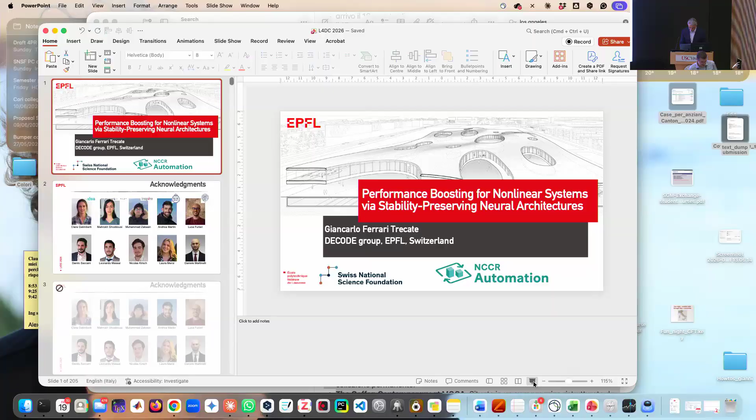Professor Ferrari Trecate is also the founder and chair of the IEEE CSS Society Swiss chapter, and a senior editor of the IEEE Transactions on Control Systems and Technology. Today he's going to talk about performance boosting for nonlinear systems via stability-preserving neural architectures. We're looking forward to the talk.

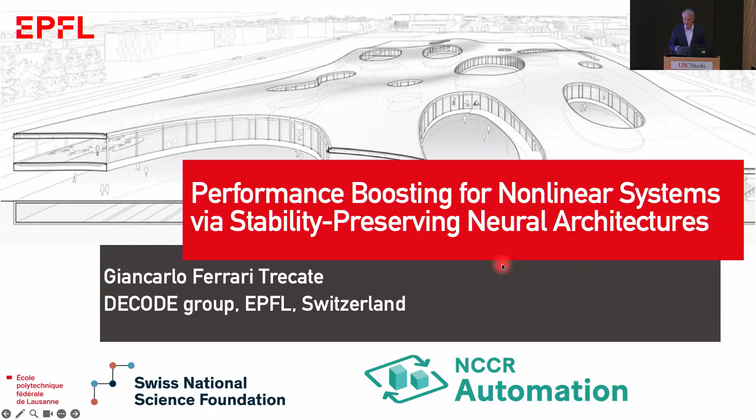First, I would like to acknowledge the key contribution of my students. In the top row, you see former lab members who moved to their next job in academia and industry. In the bottom row, current lab members who are very actively doing research on the topics that I will present today.

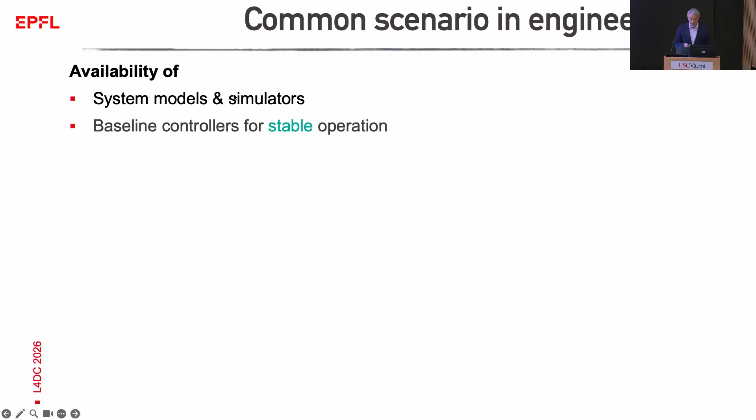The research has been motivated by a common scenario in engineering. Often we have system models and simulators of the system we want to control, but also baseline controllers guaranteeing some form of stable operation. And the problem often, rather than stability, is really performance.

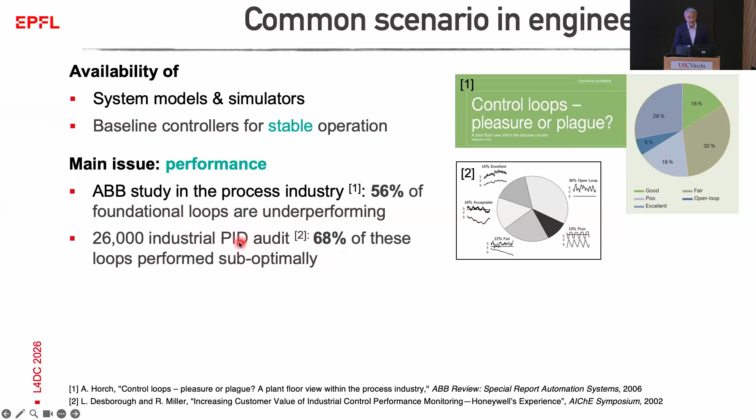To support this claim, let me mention an ABB study in the process industry showing that 56% of foundational loops in the process industry are underperforming, and a considerable percentage of these loops are not really closed loop, but open loop control. There is another study conducted a couple of years earlier by Honeywell, where 26,000 industrial PID controllers were audited, showing that 68% of these loops performed in a suboptimal way.

Performance is not affecting just industrial plants, but also systems we have in our labs. Here you see a beautiful robot built in the lab of Jamie Paik at EPFL. It's made of triangular elements with onboard sensing and actuation capabilities that you can compose like Lego bricks in order to obtain robots with different functionalities.

Here you see a walker, but how is the walking orchestrated? Well, thanks to a very smart distributed PID controller. But there is a price you have to pay for using basic controllers, which is the following: the robot is slow. So this leaves considerable room for improving the performance of the robot.

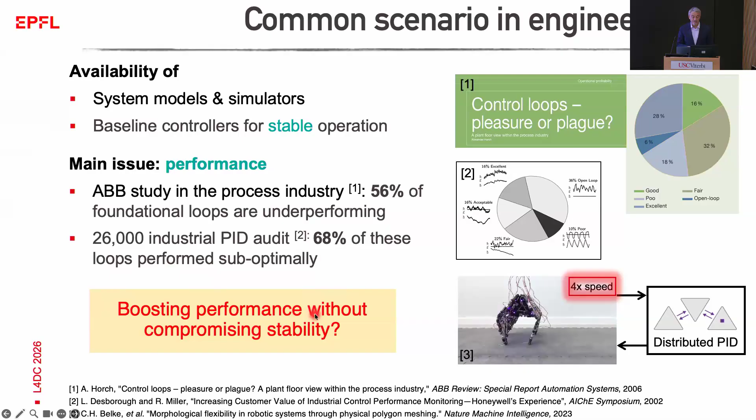And that's exactly, again, the topic of today's talk. I will talk about boosting the performance of a system without compromising stability.

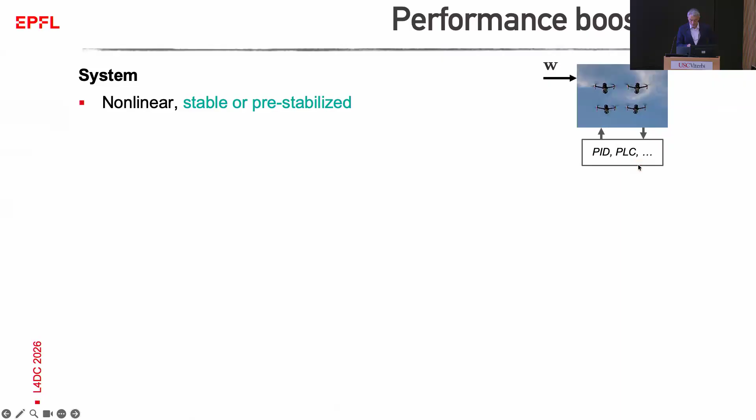Let me be a bit more formal about the problem that I call performance boosting. I want to consider a system which is nonlinear and stable or pre-stabilized. The example is here in the cartoon where you see four drones which are hovering about target points, irrespective of the wind, thanks to the internal action of controllers. What they want to do is close an outer loop in order to improve the performance of the system, represented here in the cartoon with the four drones doing a backflip maneuver.

More concretely, what we want to do is minimize a cost function, L, defined over a finite horizon, and L is an arbitrary cost, so not convex, not quadratic. Why this? Because I would like to include in L performance measures of interest for companies. For instance, in industry, you are interested in optimizing economic factors, minimizing energy consumption, or promoting safety. And since I want to optimize a possibly highly nonlinear cost function, I also want to use a very flexible family of controllers, and to this purpose, I will include neural networks in the controller.

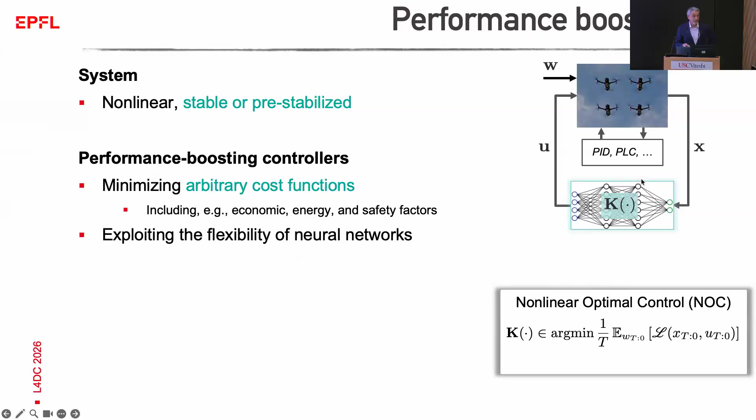What's the key challenge? How to guarantee closed-loop stability. We know, even in the linear case, that even if the plant under control is stable, you cannot plug in whatever controller and hope to have closed-loop stability, right? Here I want to study the same problem, but in the full nonlinear setting.

So, if I have to summarize in one sentence what you will see in this talk, I will show basically how to optimize over sets of neural policies which are stability preserving by design.

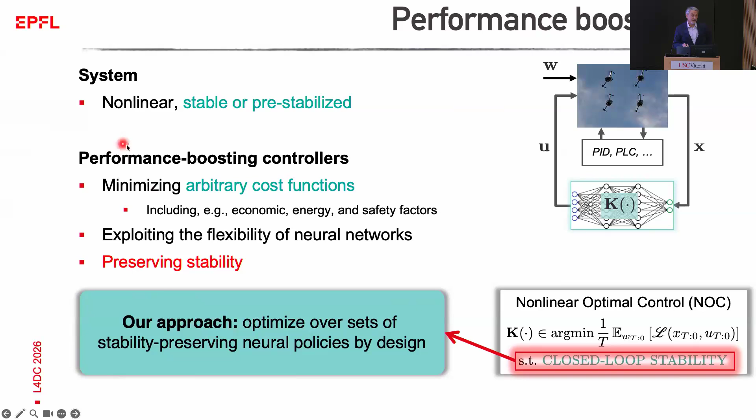Okay, so this brings me to the outline of my talk. First, I'll describe in more detail performance boosting controllers, starting with a theoretical result showing how to represent all stability preserving policies using a nonlinear operator. Then I show how to solve the nonlinear optimal control problem using neural policies to model these operators. The second part discusses the flexibility of the PB framework, showing that by shaping the cost and the operator suitably, you can fulfill several control objectives and cope with a variety of architectural constraints. Then I'll wrap up with conclusions.

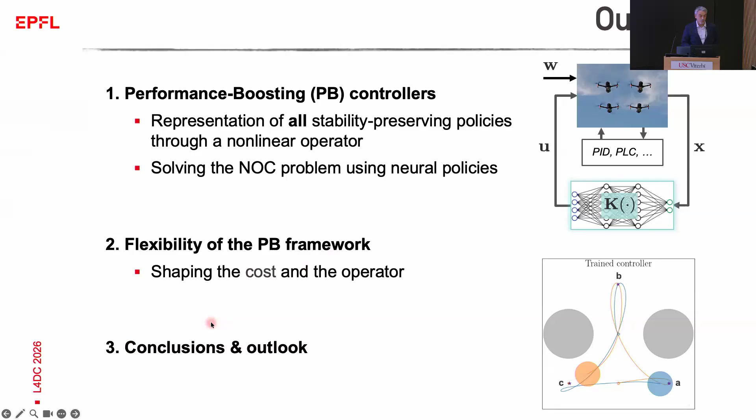So let me move to the first point. First, I need some notation. In this presentation, I will consider nonlinear time-varying discrete time systems in the state space, as you see here, affected by process noise. The only non-standard point is that I'm using the index T for F and W instead of T minus 1, just for notational convenience. Any standard nonlinear system can be written in this form.

Here I'm using also controllers which are time-varying and dynamical, and the dynamics is captured by the fact that the variable u at time t depends on the whole past history of the state.

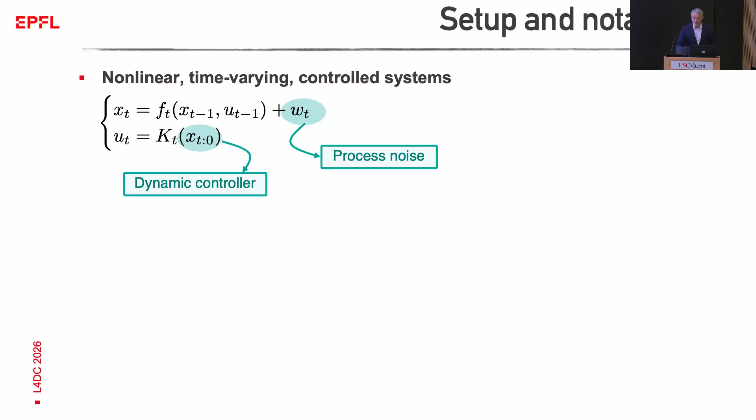Often I will abstract away from time by using lowercase bold letters for representing sequences and uppercase bold letters for representing operators, mapping sequences into sequences. This allows me to write this model in the signal space through algebraic equations that capture the closed-loop, infinite horizon evolution of the system.

To be more precise, and to show how to build the operator F, assume for the moment that the system under control is linear, so F is defined by the two infinite matrices you see here, with copies of A and B in the lower diagonal. What I've done is simply copy and paste this equation at each time instant to obtain this representation. One last point: I'm also embedding the initial condition of the system as the first element of the vector W, so I can assign this as an exogenous signal.

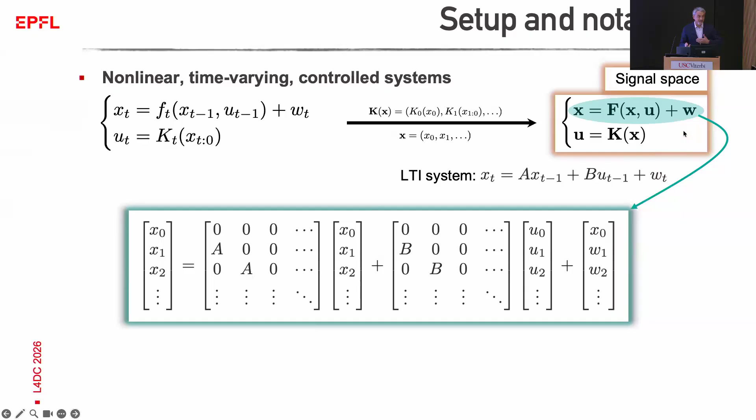Second point: stability. I'll focus on LP stability. An operator is LP stable if it has two properties. First, it's causal - I assume causality by default. Second, it maps LP sequences into LP sequences. A sequence is in LP if it goes to 0 fast enough for this sum to be convergent. When p equals 2, I'm just measuring the energy of the signal. For short, I'll use a calligraphic LP to denote the class of LP-stable operators.

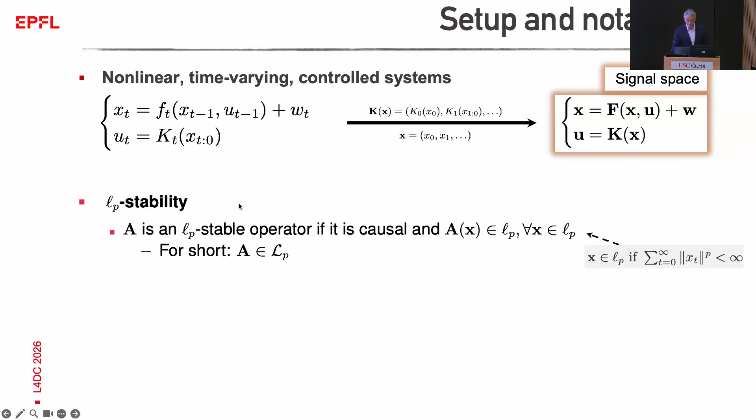I want to discuss stability in closed loop. What does it mean that the closed loop is stable? If you close the loop, the only exogenous signal is W. So here I want the operators, or the closed loop maps, from W to X and from W to U, to both be LP stable. That's the definition of closed loop stability, consistent with the definition of internal stability for linear systems.

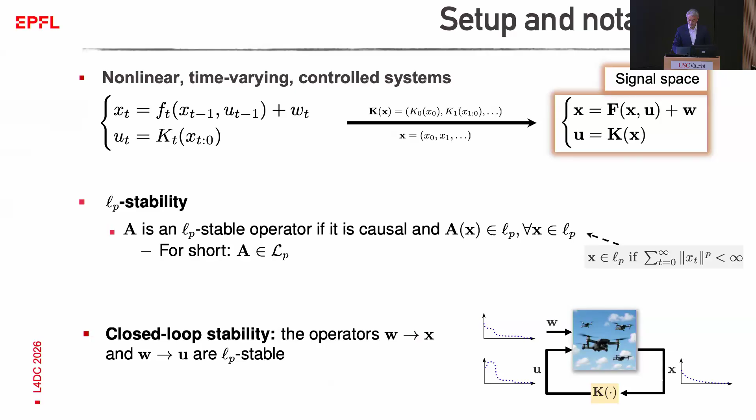Let me move to the main result. We want to consider control structures of this form, where in the red frame you see a block diagram representation of the system. I call calligraphic F the system mapping the inputs W and U into the state sequence. In the orange frame you see the control structure I propose, where I have a copy of the system dynamics followed by this operator M, which is a free operator in LP.

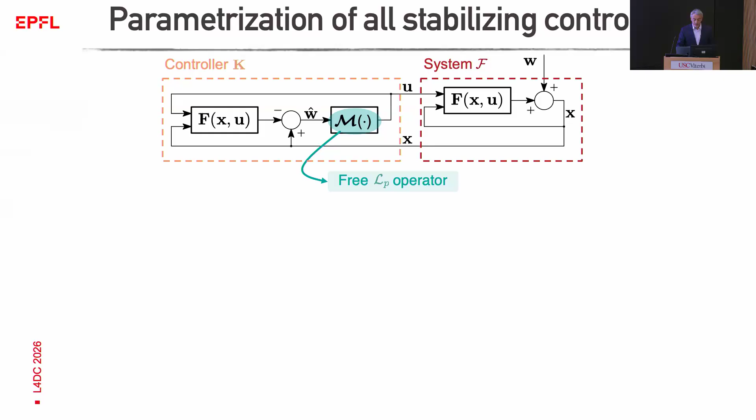Why is this control architecture interesting? Because if you assume that calligraphic F is LP stable, then choosing M in LP is necessary and sufficient for preserving closed loop LP stability. This means two things: first, if you plug in here whatever LP operator, you preserve closed loop stability. But second, even if you replace the controller K in the orange box with another one preserving closed loop stability, there is also an operator M implementing exactly the same controller.

Now, if you want to implement the controller, you just have to go back from the signal space to the time notation. The summation node here is just for reconstructing the noise W, so W hat is a reconstruction of W, and then you pass the W sequence to the operator M to compute the control input. I will show later how to translate this last step into a computationally friendly algorithm.

Now, is this control architecture new? Not quite. We have replicated the model of the system into the controller, so we are considering an internal model control architecture that has been proposed by Economou, Morari, and Palsson in the 80s. But they were able to prove that this architecture is sufficient for preserving stability. Now we also have the necessity part.

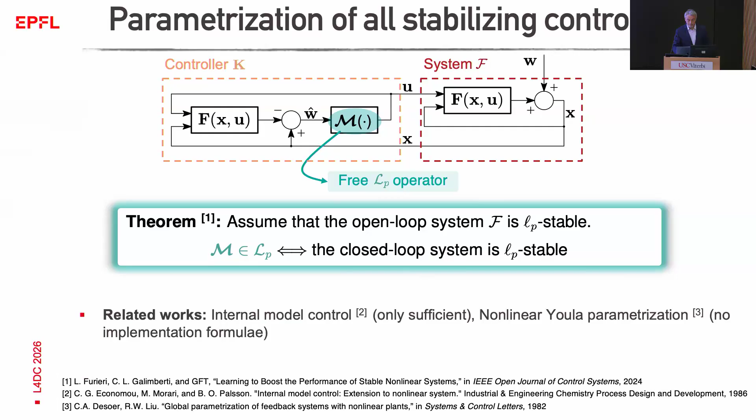Okay, let me highlight a weak point of the theorem. We have a necessary and sufficient condition if we plug into the controller exactly the model, the real model of the system. But what happens if we have model mismatch? So we have a nominal model F hat here, and the real system is F hat plus a mismatch delta.

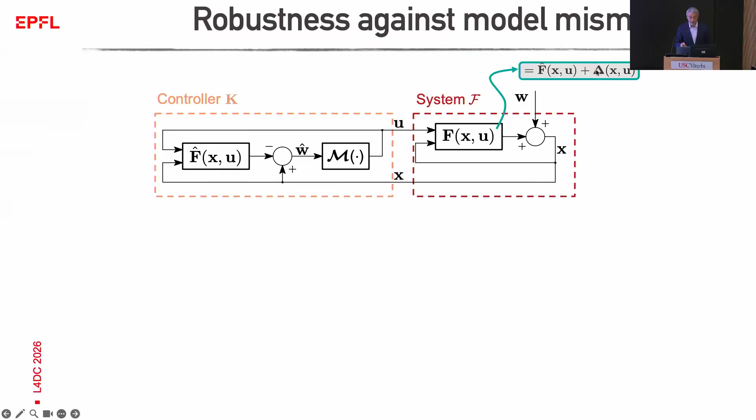You can still preserve stability by detuning the LP gain of the operator M. We have a precise bound. If the LP gain of M is less than this term, which is mismatch dependent, then you have closed loop stability.

Now, if all the blocks that you see in the diagram are linear, you can compute this quantity. Otherwise, if you have fully nonlinear systems here, it can be difficult to get the precise gains, but the message is if you detune the gain of M enough, you still have stability.

And the other point is that this inequality is non-conservative in a sense, because when delta is 0, there is no mismatch, the upper bound goes to infinity, and you recover the necessary and sufficient condition of the previous slide.

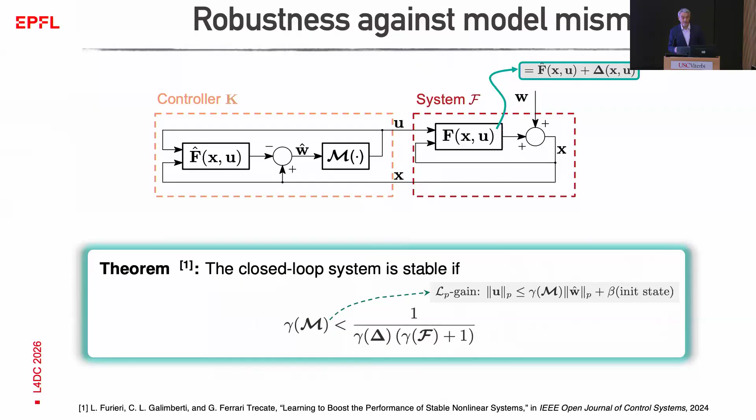Okay, so let me now show how to implement the operator M using neural networks. As I told you, for stability, you want to choose M in LP, and optionally, you want to put an upper bound to the LP gain of M, but the problem is that LP is an infinite dimensional space, so optimization over LP is intractable.

And for this reason, I resort to a class of models that I call optimization-oriented. So these are models of the operator M with two properties. First, we want M to be described by a dynamical system with its own state x tilde, and we want to embed in the functions G and H possibly deep neural networks, but still described by a finite number of parameters that we collect into theta here, okay?

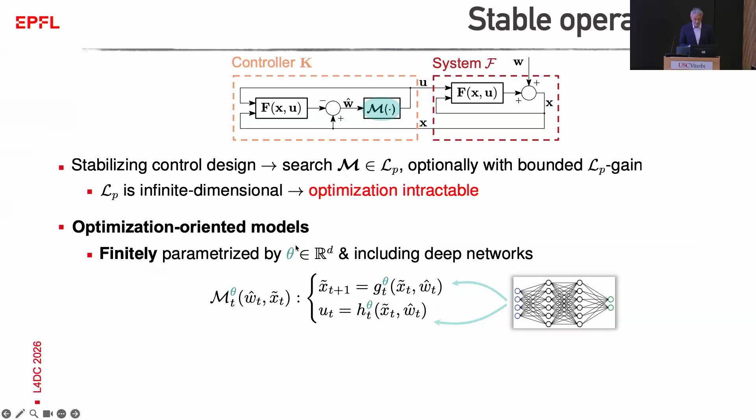And second, we want the model to be freely parameterized, which means that for any value of theta in Rd, you want that the functions G and H associated with theta provide a stable operator. This is important, because if you have this property, then you can do unconstrained gradient descent in Rd in order to optimize your operator, and unconstrained gradient descent is much cheaper than the corresponding constrained and projected counterparts, okay?

So this is what really enables the use of deep networks here before hitting computational limits. And another advantage is that you can use standard machine learning pipelines for optimizing this kind of model.

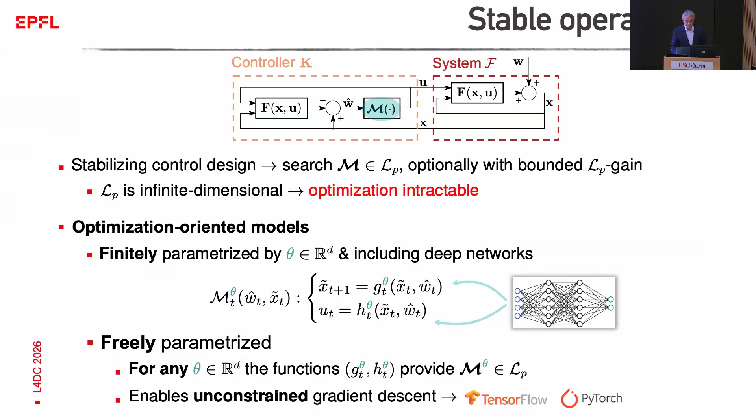Now, do we have optimization-oriented models of LP operators in the literature? Yes. If you are interested in bounded input, bounded output stability, you want to consider the L infinity case, but then any neural network, static or recurrent, with bounded outputs implements an L infinity operator.

If you're instead interested in L2 stability, so you want states converging to 0, then there are different solutions in the literature, ranging from static neural maps, proper feed-forward neural networks, to recurrent neural networks, so dynamical systems. And there I would like to mention the recurrent equilibrium networks produced by the group of Ian Manchester, but also other solutions based on Port-Hamiltonian systems or structured state-space models.

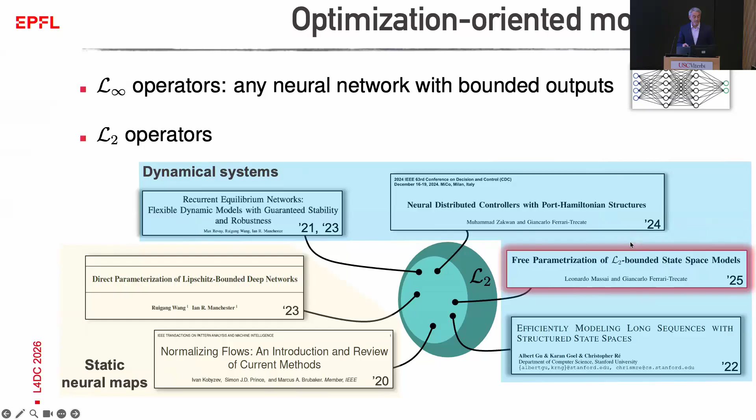And to give you a feeling of the challenge in deriving free parameterizations, let me discuss the content of this paper: how to obtain free parameterization of a structured state-space model with a prescribed L2 gain upper bound. Okay, so what's a structured state-space model?

Probably you're familiar with these models. In machine learning, they are very popular in LLMs. They are seen as the next generation of transformers in a sense. And here you see the block diagram of an SSM, a little bit simplified compared to the original proposal by the papers down here. The SSM I'm considering is composed by an encoder, which is just a rectangular matrix, a decoder, again a rectangular matrix, and then internal state-space layers which have identical structure but different parameters.

Zooming in into an SSL, you find a linear dynamical system, a Lipschitz nonlinearity with parameters xi, and a skip connection. Overall, I'm representing an operator from W to U, and the natural parameters are the matrices A, B, C, D in the SSLs, together with the parameters of the Lipschitz nonlinearity, and also the scalar entries in the encoder and the decoder.

Now the problem is how to provide a free parameterization of this model, realizing also a model that has an L2 gain less than a prescribed quantity, gamma bar. Of course, the natural parameters are not a free parameterization because you can choose the matrix A as you want and easily generate an unstable system.

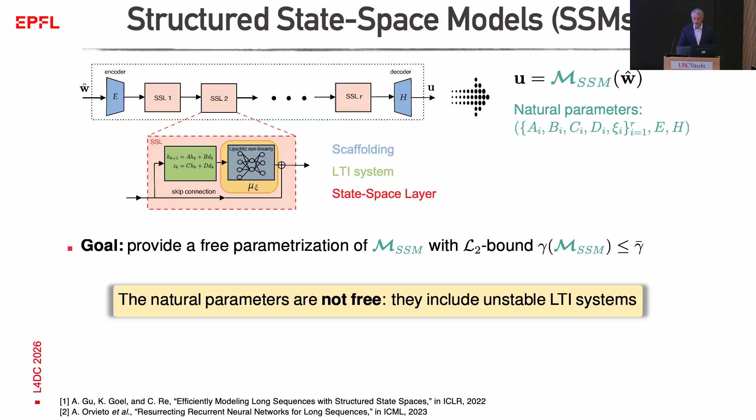So to discuss the derivation of a free parameterization, let me focus on the linear part of the SSL only. The sub-goal is to obtain a free parameterization of an LTI system with a prescribed L2 bound, gamma bar. As we have shown in this paper, you can proceed as follows.

We have a complete parameterization of square LTI systems with a prescribed L2 bound. Complete means that up to a zero measure set of systems, we capture all the systems that we want.

And then it's enough here to complement this free parameterization with existing free parameterization of Lipschitz multilayer perceptrons, and also free parameterization of the scaffolding - that's easy - in order to obtain a full free parameterization of the SSM. The details are reported in our paper.

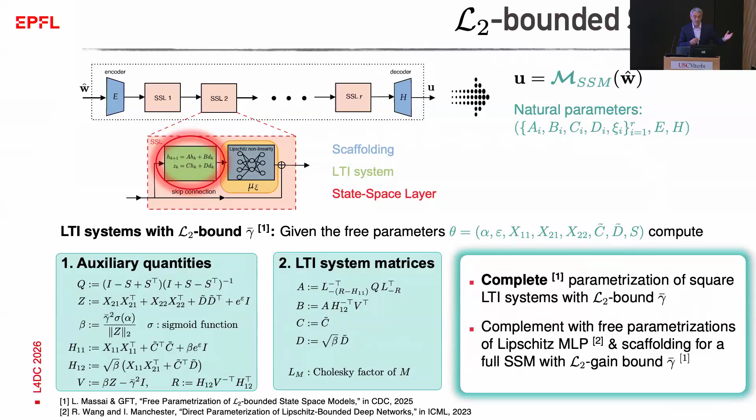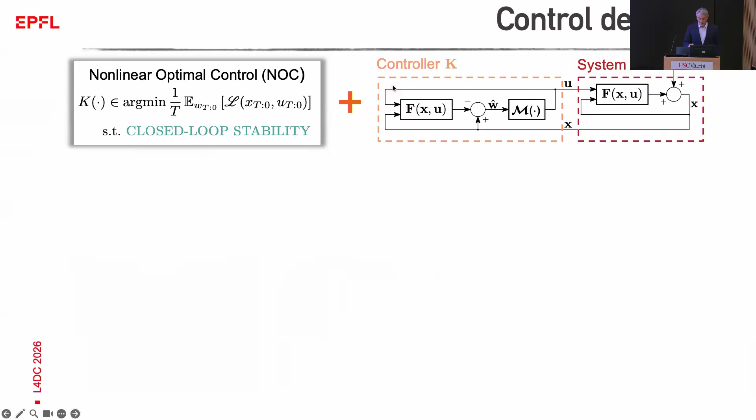Good, so let me now put everything together - how to design concretely performance boosting controllers. We want to solve this nonlinear optimal control problem. The first thing we did is get rid of the stability constraint by focusing on internal model controllers.

Now, still we have seen that we cannot search in the space of LP operators, so we replace M with an optimization-oriented model. But also, the average here is intractable, so we want to replace it with an empirical average based on noise samples.

And now what you have here is a standard problem in machine learning: I want to optimize a data-dependent cost subject to a recursive computational structure, then you can backpropagate through it. The structure is recursive when you unroll in time the dynamics of the system and the controller, and this method is known as backpropagation through time. So you can use TensorFlow or PyTorch for finding your controller.

Of course, there is a problem, which is the following: if you use too few samples, then you are overfitting your controllers to the noise realization that you have seen. And this can be not ideal when deploying the controller in the real world, where the controller is subject to new realizations of the noise.

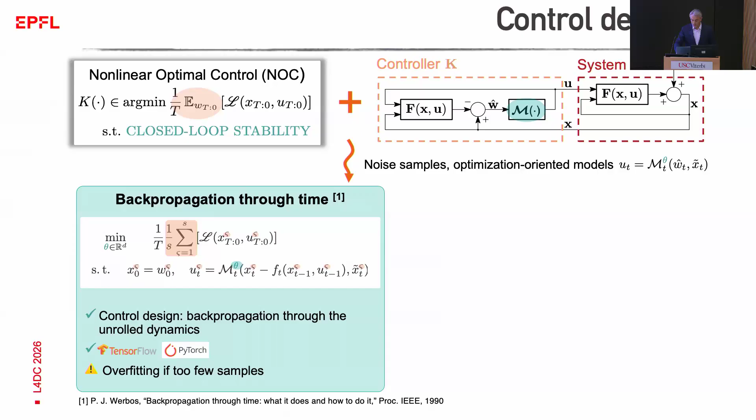But then we also developed another method based on PAC-Bayes theory. Here the idea is to define a prior distribution over the controller parameters, the parameters of the operator M, and then use noise samples and the cost in order to obtain a posterior distribution over controllers. In this context, design means sampling from the posterior - not always easy if the posterior is very complex, but the advantage is that now we can incorporate prior knowledge about good controllers by specifying the prior distribution, and also we can mitigate overfitting and obtain generalization bounds.

So upper bounds with high probability through this cost, which is the true generalization cost that we cannot compute.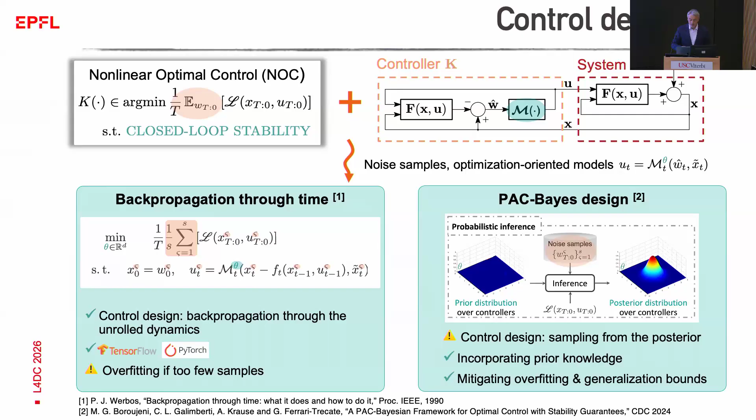Good, let me now move to some examples. I'll start considering a very simple one, the corridor problem. We have two robots, orange and blue - these are point mass dynamics, with just a small nonlinear component, which is a nonlinear drag. We want to stabilize the robots on the corresponding targets while avoiding collisions, and also collisions with the obstacles.

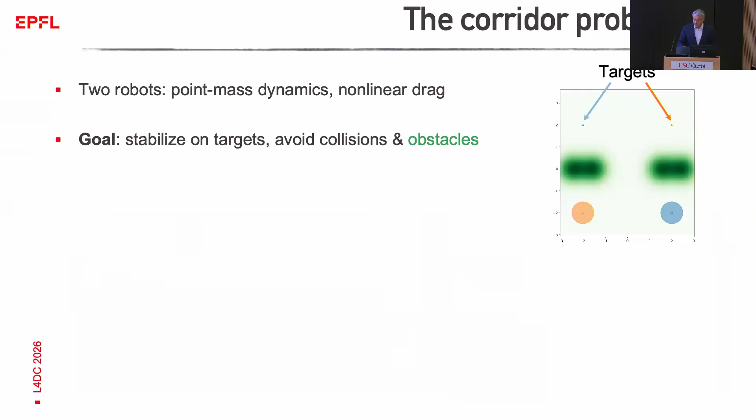Now, the performance boosting framework enables a separation of concern principle if you want to perform a design from scratch. First, you care just about stability, and we can stabilize the robot to the targets using a very simple baseline controller. It's a proportional controller mimicking the presence of a spring connecting the endpoint to the initial point. You see here, you have collisions, also overshoots, but we don't care about this.

We compensate for this phenomena in the second stage, where we add a control component UT that we define through performance boosting. So now we obtain a neural controller that tries to optimize this cost, where we penalize the energy for reaching the targets, collisions between the robots, but also collisions with the obstacle, the green parts here in the plot. And in these two terms, we use barrier-like functions to promote the absence of collisions.

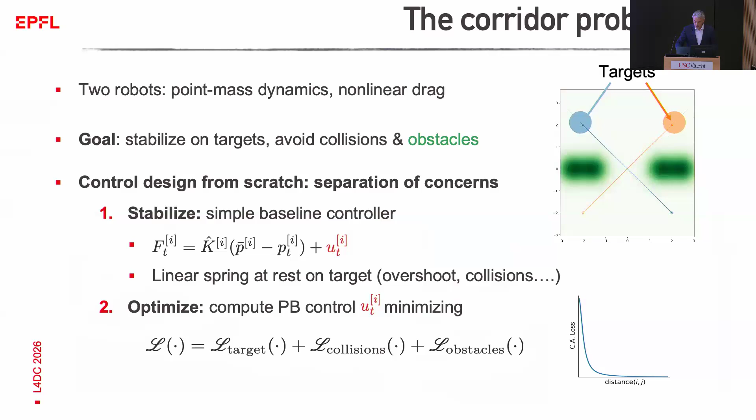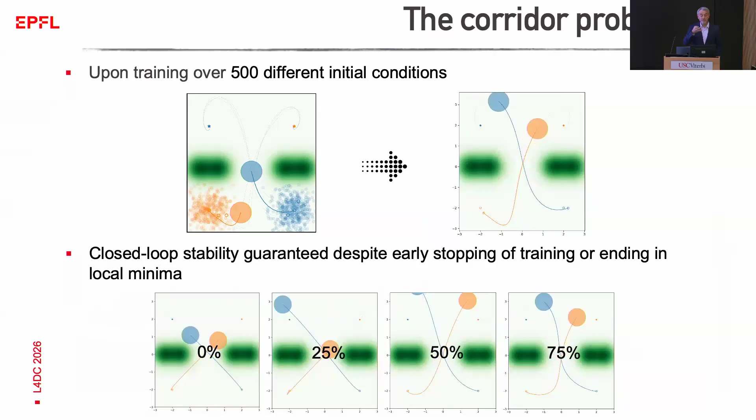When you close the second loop, the robots learn how to solve the corridor problem and stabilize at the destination. An interesting point here is that closed-loop stability is guaranteed despite early stopping of the training, or even if you end in a local minimum, you never lose stability. That's exemplified by the clips down here, where I stopped the training iteration at 25%, 50%, 75%. Of course, performance is worse, but stability at target is never lost by construction, because the iterates of gradient descent are all in the space of controllers that preserve stability by design.

Let me give you another example where we want to stabilize the 3 drones here to the corresponding targets, avoiding collisions and obstacles. But in this case, we used Mujoco models. We didn't derive the state space equation of the systems, specifically we used the Bitcraze Crazyflie 2.0 models with a baseline proportional derivative controller for target reaching. This is the work of my colleagues Christian Brugnara and Dario Piga at the Institute Dalle Molle in Switzerland.

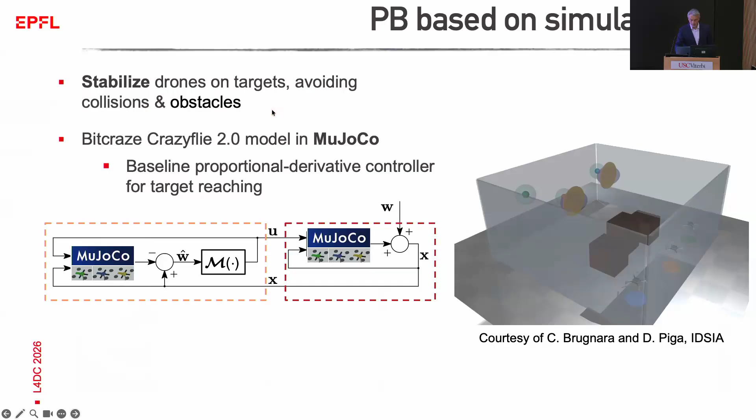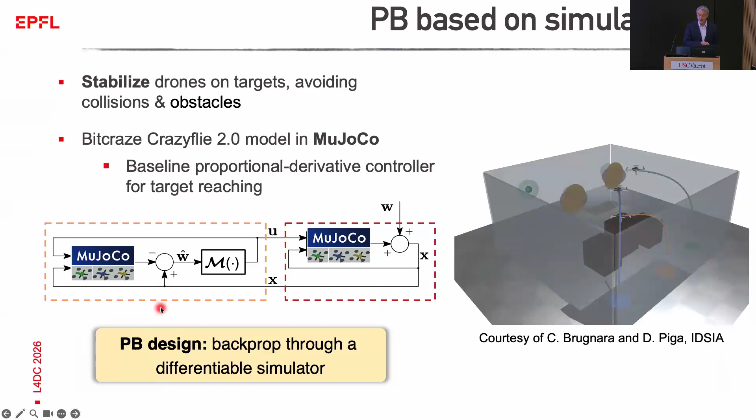What they did is really to plug the whole simulator in the loop for design. So now we can backpropagate through the simulator and obtain the operator M that tries to stabilize the drone and avoid collisions. After doing this, that's what you see in the simulation, so the drones are really capable to go to the target in a stable way while avoiding collisions. So we can backpropagate through differentiable simulators, and this is thanks to the fact that the framework allows for fully nonlinear time-varying models.

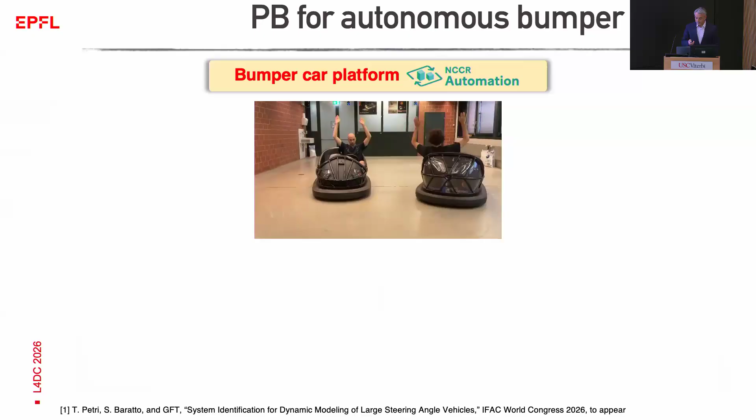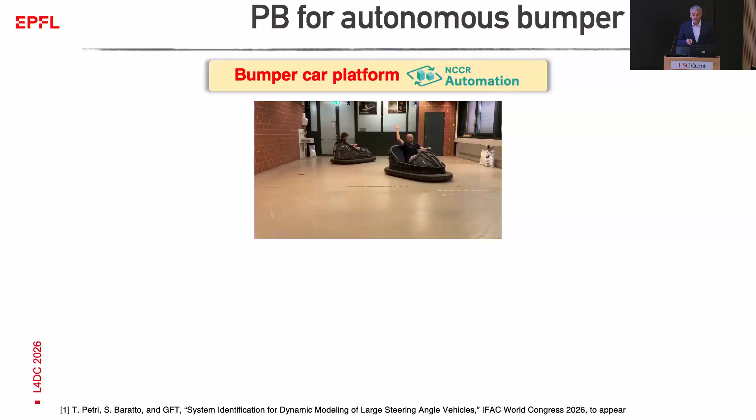Last example, now it's a real example, and for this we use the bumper car platform that I have in my lab. That's a platform we have developed with the support of the NCCR Automation, which is a big project about automation and AI in Switzerland. What we did here is to take bumper cars from a Luna Park and engineer them in order to have fully autonomous vehicles, that in general we use to demonstrate to the wide public how control can be very useful for promoting safety in autonomous driving.

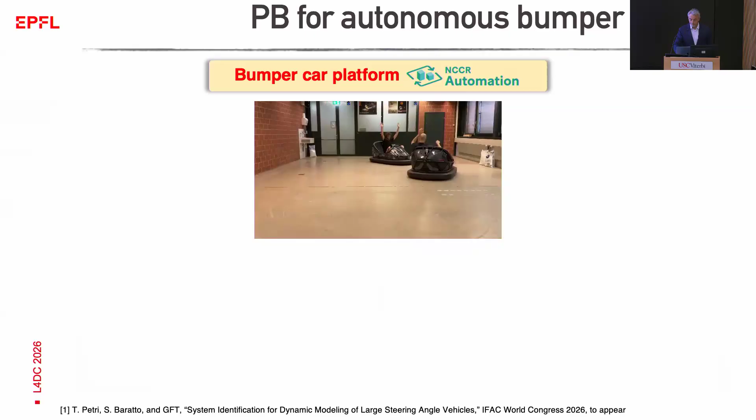That's the game here played by my students. But today I'll use the bumper cars in order to discuss the properties of performance boosting. So we need a model, and to this purpose we have developed a digital twin of the bumper car, which is composed by a first principle non-holonomic model complemented by a neural network part.

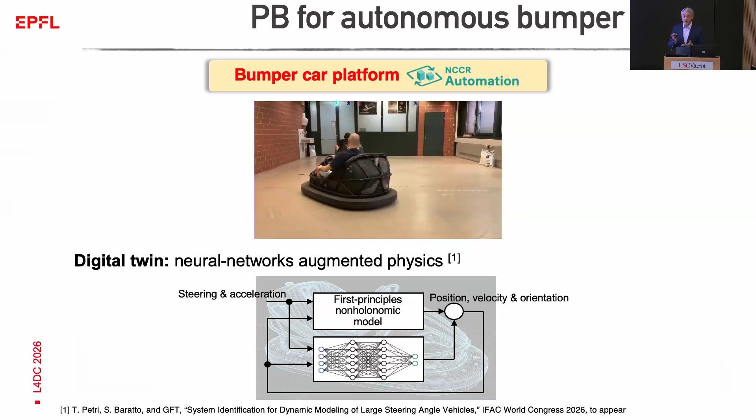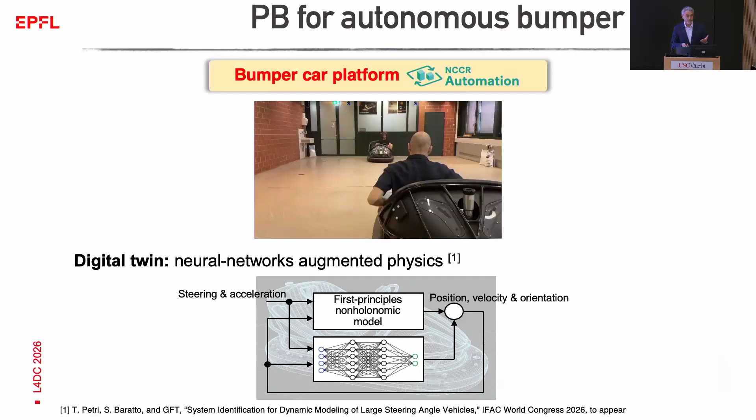Why? Bumper cars have a wide steering angle, more than 100 degrees. And during extreme maneuvers, there's also a rubber part at the bottom of the car that touches the ground. These are very difficult contact phenomena to capture using first principles, so that's why we use the neural network model here.

And what we did is to take this model and use it as a baseline here in order to compute the operator M, in order to solve again the corridor problem, but now with a much more complex model. So we want to stabilize the two bumper cars to the corresponding targets and avoid collisions, also collisions with the obstacle, the two little chairs that you see here.

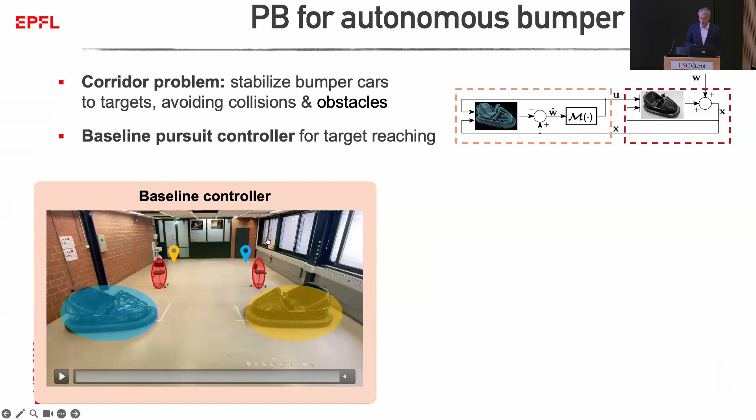The baseline controller is just a simple pursuit controller, and as you see, the cars bump into each other. They also try to reach the corresponding target, but this is not possible because they cannot cross each other, so in the end they land in a random point. While if you use performance boosting, they learn how to give way in order to avoid collisions, obstacles, and get to the destination.

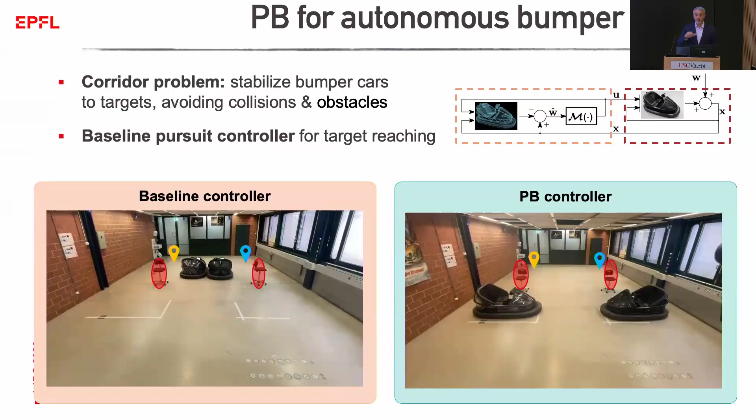Not only that, but if you start from a different initial condition with a different heading, then you have a different behavior. In this case, the car on the right waits before going to the destination. So the policy is really dependent upon the initial condition of the system.

Okay, so let me now discuss the two sources of flexibility of the framework, which are the cost function and the operator M.

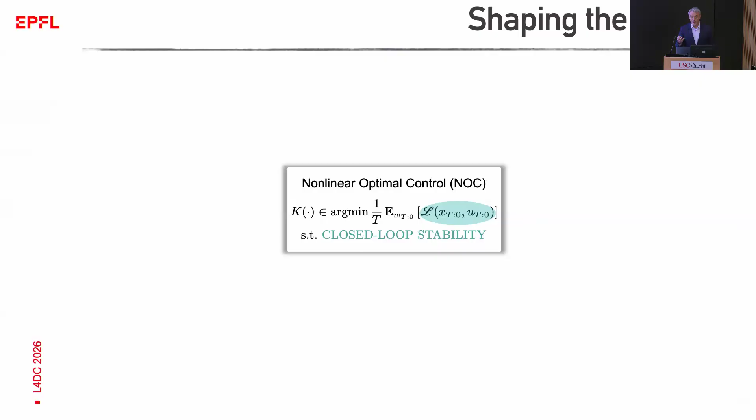The cost function appears in the optimization problem, and now we can choose it with a lot of flexibility, as people in reinforcement learning do all the time. Therefore, you can promote a variety of behaviors by choosing the function in a suitable way. For instance, you can enhance classic time-based performance metrics, like reducing the settling time, improving the decay rate, reducing the overshoot. This can be done by shaping L in a suitable way.

But you can do more. You can also promote probabilistic safety certification by introducing risk-aware terms in the cost that basically try to optimize the probability that the state lies within a target region when the noise is stochastic.

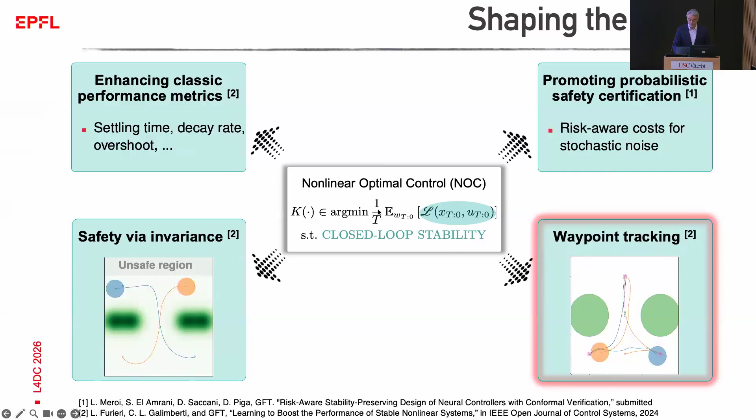In this example, we have the two robots that we have seen before, and the task specifications are as follows. We want to avoid collisions, but the blue robot has to visit point A first, B second, C third, and stabilize at destination. The orange robot, different order: first C, then A, then B, and stabilize at destination. So how can you promote the mission by designing a cost?

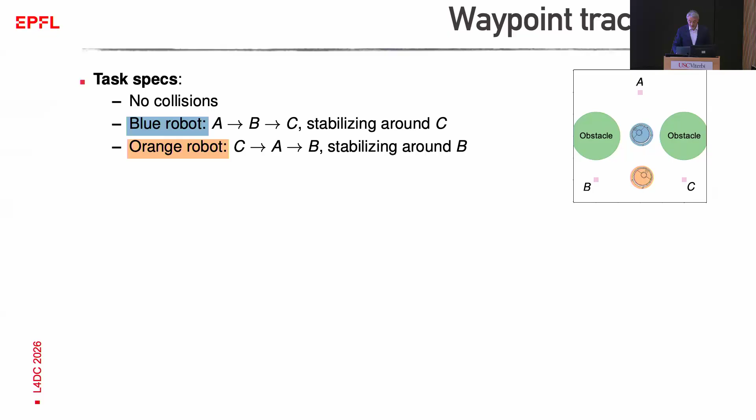There is a solution: you can use linear temporal logic. There is an automatic way to translate a linear temporal logic formula into a cost, which is complex, would take probably a whole slide if you write it down, but still we have a candidate.

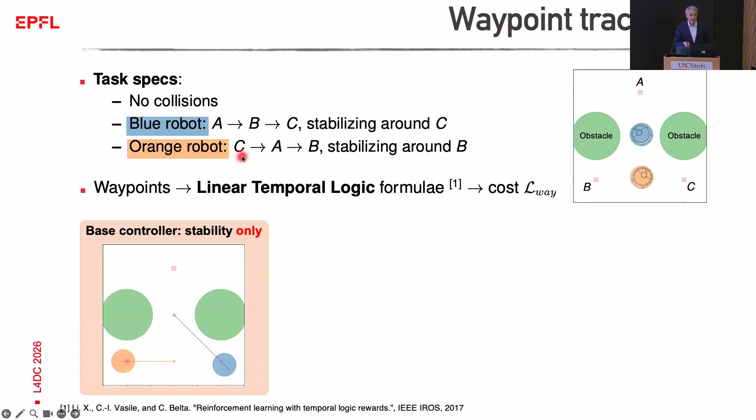Now for controlling the system, we do as before. First, we design a base controller only for stabilizing robots at destination without caring at all about the mission. Then, by optimizing the cost you see here, you obtain the desired behavior by closing the outer loop through performance boosting. So here we try to promote the absence of collisions, the fulfillment of the mission, and also we try to minimize the total energy spent by the robot.

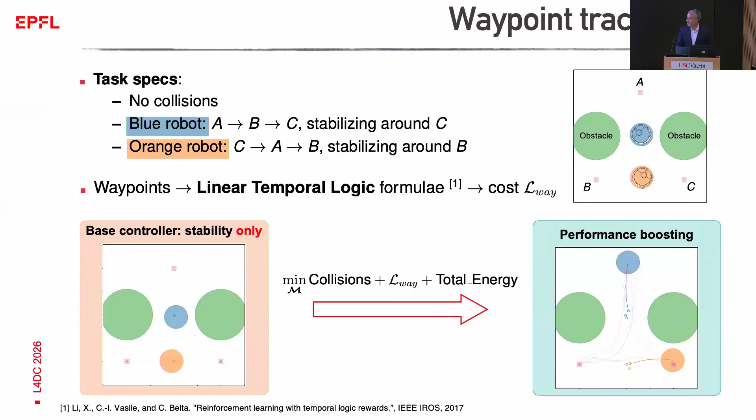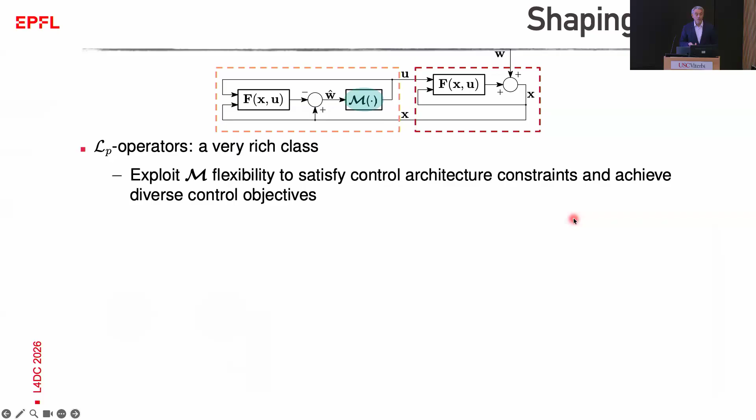Okay, let me now move to the other degree of freedom we have, which is the operator M. We can choose M in LP, but the class of LP operators is very rich, so we can use this flexibility in order to satisfy control architectural constraints or to achieve specific control objectives. Here you see three examples.

First, we can design operators with a distributed structure, so local operators interconnected by a communication network. The real challenge here is how to derive a free parameterization of interconnected operators. But if you can do it, then you can associate a local performance boosting controller to each robot and minimize the cost, which is stabilizing the robots at the targets, and at the same time tries to minimize the formation error in reaching the targets. So this is a truly distributed controller.

Second, you can synthesize M online as time goes on, using, let's say, a receding horizon approach for solving the optimization problem that I've shown before. That's very useful if you have, for instance, moving obstacles, or if you have sudden spikes in the disturbances affecting the robot. Last, you can embed in the operator M contextual information, here in the form of the destination points that now are specified at runtime.

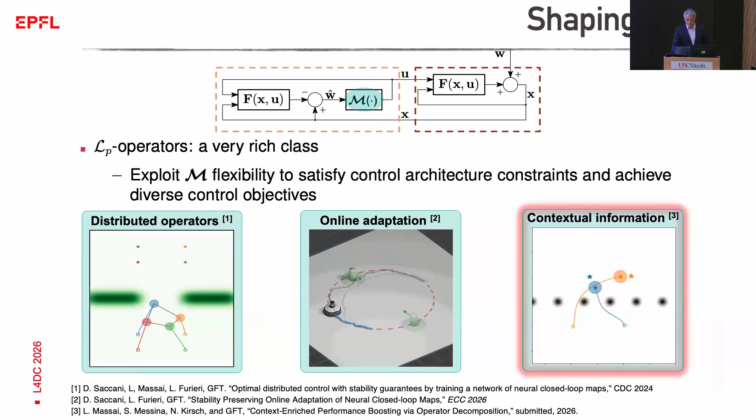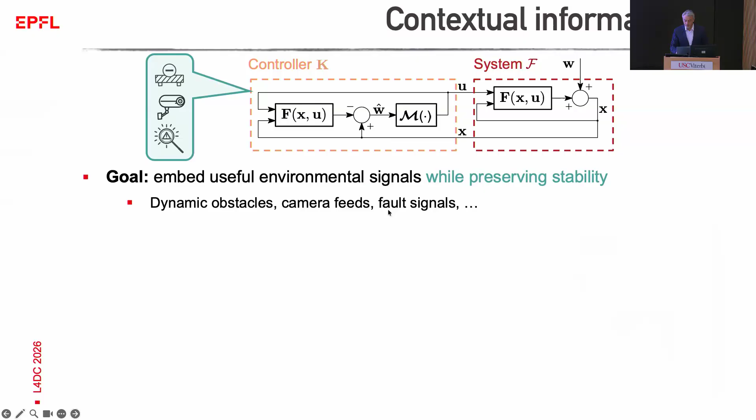Now, what's context information? To me, it's any useful environmental signal that is sensed and can be used in the controller in order to improve the control action. We want to do this while preserving stability. Examples of context: if you have a robotic system, you might have dynamic obstacles that you might track, but also camera feeds, possibly processed through AI pipelines, and even fault signals if you have some fault in the component of the system during deployment. You will see an example of this later on.

Now the point is how to use this. I have here an operator which is in LP, but now using also context. Context is not necessarily an LP signal, so it's not necessarily a vanishing signal. In order to include context in the operator M, we propose the following factorization: we write M as the product of two operators. The first is an operator in L infinity, so a bounded operator that gives as output at every time instant a matrix and depends on the context. The second operator gives as output at every time instant a vector, and here we take the time product of the sequences. This defines a vector envelope, and we can also make this operator dependent on the LP part of the context, so context signal that vanishes over time.

Now, you may think that this representation is a limitation, but not really, because we have shown that you can represent an operator set dense in LP through this factorization. So roughly speaking, this means that any operator that is relevant for engineers can be written in this form.

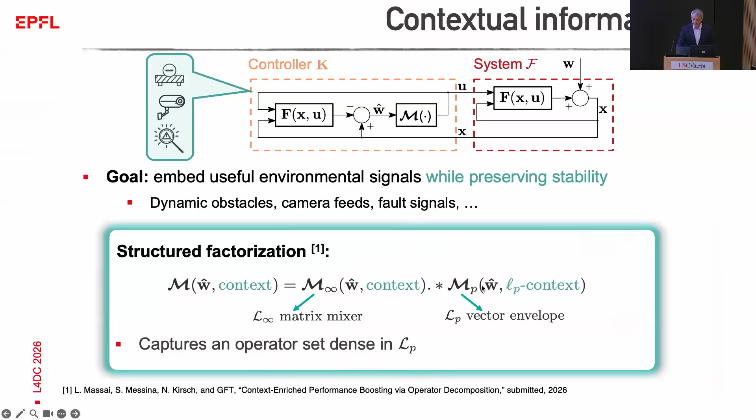Let me also give a bit more intuition about why using context is so important. I'm considering here the control input in 2 dimensions, so a vector with 2 components can be represented in polar notation. I'm using here an operator MP giving a scalar and taking the absolute value for the magnitude component, and a generic causal operator here that gives me the angle.

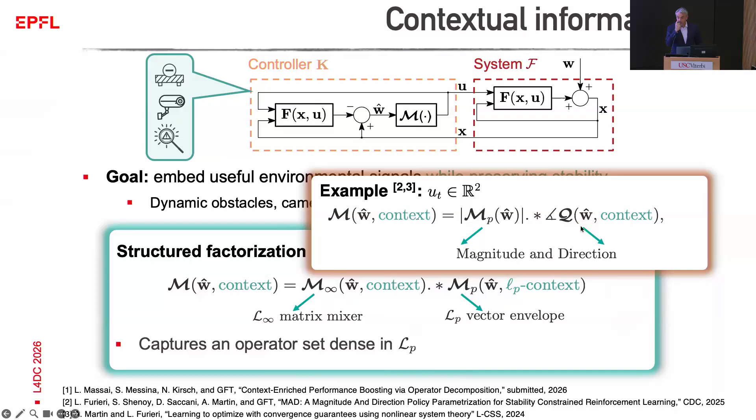And now I can introduce context in here. That's the M infinity part in the general description. So I can make the direction of control dependent on the context. And that's why introducing contextual information can be very useful in control.

And for solving this problem, we develop a controller using this context. The context includes the position of the gate, how close the robot is to the upper and lower walls, which tells the robot when to act to avoid collisions, and third, the time since the last gate switch, which tells the robot how stable the gate is.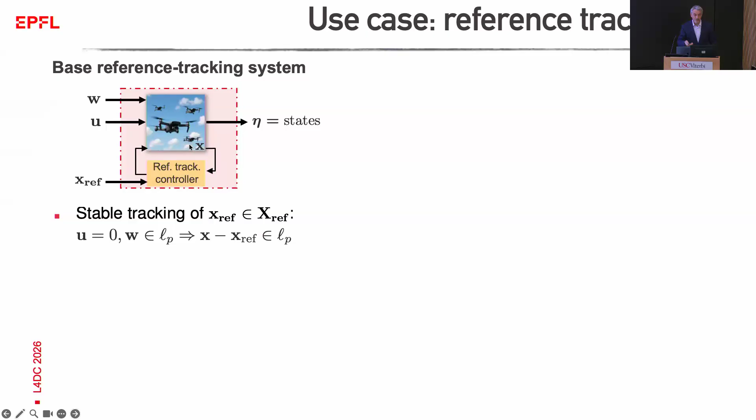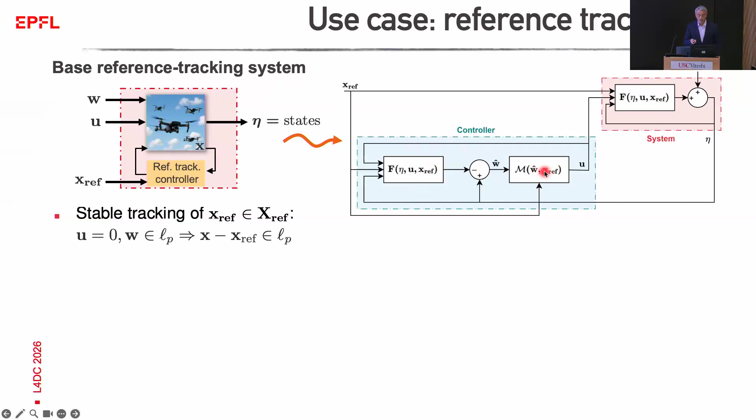Now, for boosting the performance of the base reference tracking system, we put the system in the pink box up here. Again, take a copy of the system and put it in the controller, followed by an operator, calligraphic M. But now the difference is the following: we supply M with the reference signal, and the reference signal is not necessarily in LP, it can also be a constant signal. Still, we have the following result.

Assume that M, the operator here, has the following properties: the output U is an LP signal for all possible W's in LP, but XREF is in the set, capital XREF. Then the blue frame represents all and only controllers that preserve stable tracking. But now M is not an LP operator — it has to produce an LP signal even when using context signals which are not vanishing.

So how do we design this operator? Well, that's easy. We use the parameterization presented in the previous slide, and we embed the reference signal as context. So we split M into the M infinity part, XREF dependent, and an LP part.

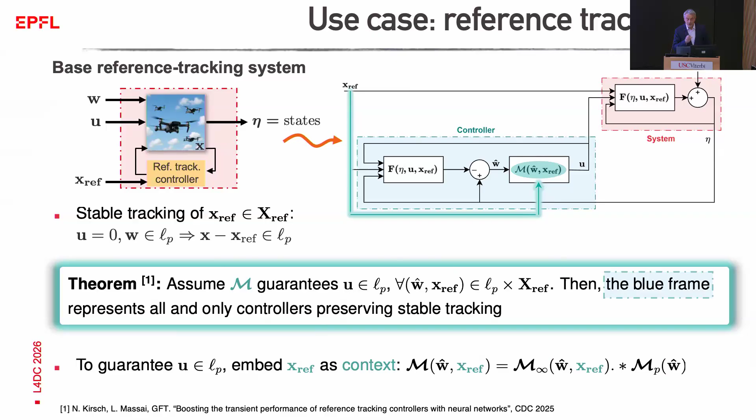And to conclude, let me present an application of the framework in an even more complex scenario where we want to do at the same time reference tracking and also compensate for faults.

So here I am considering an active front-end drive system, which looks like the one you see in the picture, and here you have a block diagram representation. The goal of the system is to take power from a medium voltage grid and feed a motor that has to track a velocity reference for the attached driveline, which is represented here.

The electrical and mechanical parts are coupled through the DC link, which acts like a power buffer and partly decouples the two sides of the system. The DC link gives power to the motor when needed, but can also transfer power back to the grid when it's overcharged.

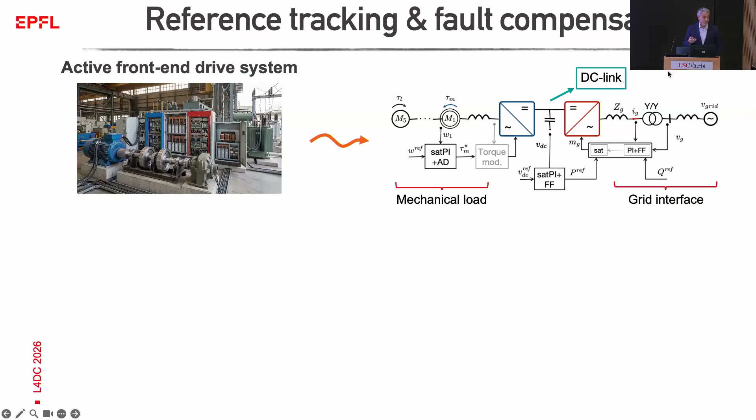Now, we have baseline controllers for these industrial systems, which are PI loops with saturations and feed-forward actions, and the goal of these basic loops is to track three references: the angular speed of the driveline, the voltage of the DC link, and the reactive power sent back to the grid, in spite of disturbances, which are the load torque applied here, and the deviation from the standard three-phase voltage in the grid.

So, in spite of these controllers, there is a critical scenario: you might have grid phase loss. When you have this phenomenon, which is rather frequent, the voltage across the DC link goes outside safety bounds, and this is very critical because it triggers immediate shutdown of the plant, implying financial and productivity losses. Next I will show how to preserve the tracking properties of the basic PI loops while also improving the faulty behavior.

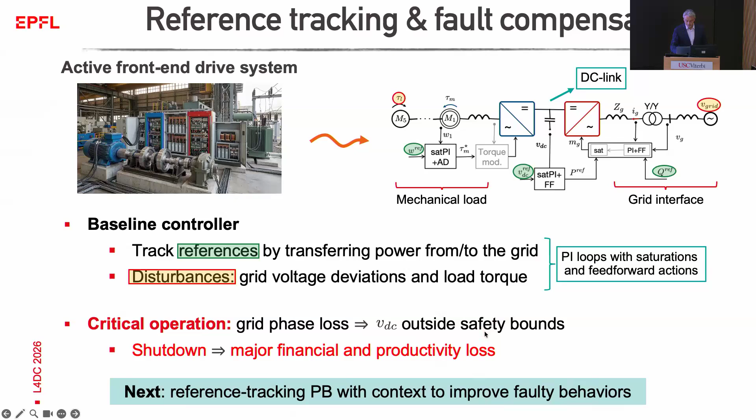What we have done is use the reference tracking PB scheme introduced before, and now we have plugged the model of the system here for control design, and a bit more realistic simulator here for obtaining simulations. Note that the subsystems are fed with the reference signals, but also the disturbances, which are measured - these are torques and voltages, so easy to measure.

Now, how to design the operator M? Using the splitting method I've described before. So we have an M infinity part and an M2 part, and we make the M infinity part dependent on the disturbances, but also the voltage across the DC link and the grid current. Why? Because these signals are heavily affected by a fault, so basically they tell the controller how to counteract a fault.

These are also signals which are not in L2 - VDC generically doesn't go to zero, so we embed them in the M infinity part of the operator. We also use a fault indicator in the M2 part of the operator, which is there for waking up the operator when there is a fault, because the M2 part tends to produce a signal that goes to zero otherwise.

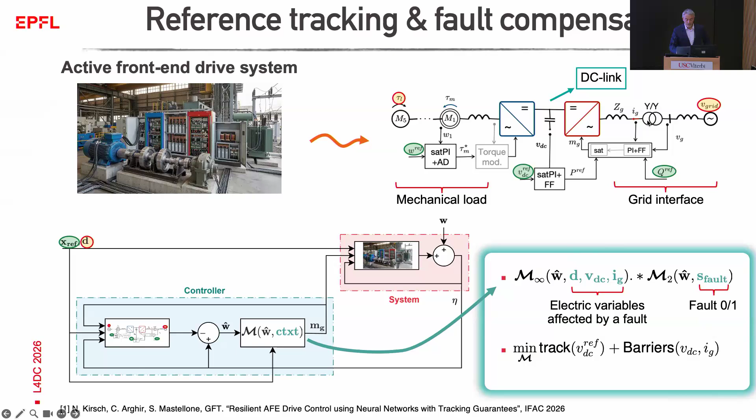After designing the controller, we obtain the following result in a scenario where first we have a total loss of phase C of the grid, and then later on a 60% reduction loss of the same phase. These are faults that happen in this part of the plant.

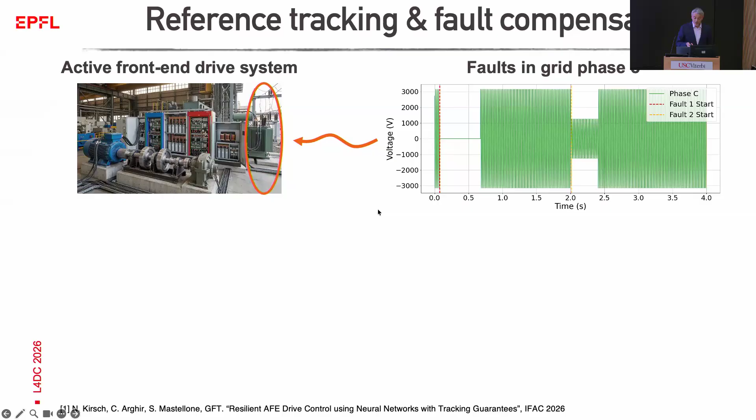For the second fault, even the PI loops are able to keep the voltage within bounds, but performance boosting keeps the overall voltage closer to the reference. This is achieved because we are using neural controllers, so nonlinear controllers, that can shape the frequency content of the grid current in a very subtle way, something very difficult to achieve using just linear loops.

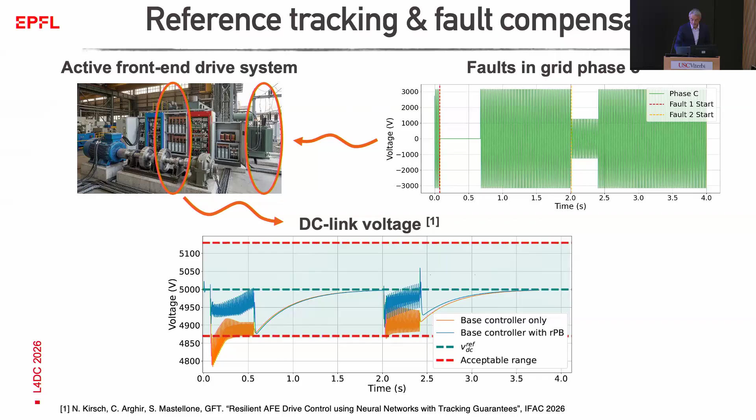Okay, so this brings me to the conclusions of my talk. First, I tried to convince you that performance boosting is really a flexible framework for improving the performance of a nonlinear system, and this framework enables a separation of concerns - first care about stability, even with a simple controller, then optimize for improving performance. The second message is that we now have tools in the literature for implementing and training these controllers, because we have a free parameterization of stable neural networks that allow searching over stability-preserving policies.

Second, we have several extensions of the framework I didn't mention today in the interest of time. For instance, extension to output feedback controllers, methods for guaranteeing safety in a rigorous way, not just promoting safety through the cost, but also recently we have developed a dual parameterization.

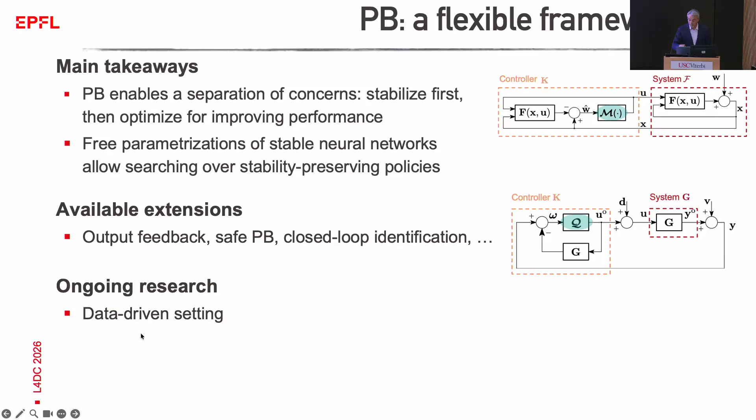So we have parameterized all the plants that are stabilized by a given controller, which is very useful for developing new closed-loop nonlinear identification algorithms. And finally, in terms of research, the main point is that we need a model of the system, so we are studying how to lift the framework to the full data-driven setting, but also we are considering several applications together with our colleagues. For instance, applications to district heating networks together with Polytechnic of Milan, applications to microgrids in the framework of this project sponsored by the Swiss project that I've mentioned before.

And also we are studying, trying to understand if and how performance boosting can be used for improving so-called artificial pancreas systems, where you have an insulin pump that has to react to measurements in continuous time of the glucose in the blood of the patient. So we want to understand whether we can build upon these basic loops that are available already today in order to improve the quality of life of the patient.

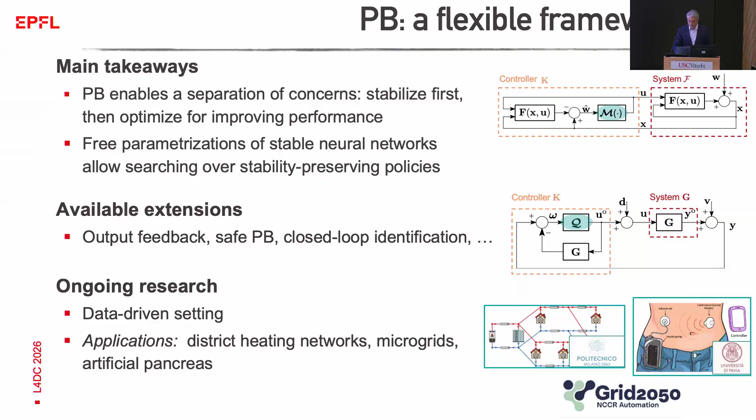And this brings me to the conclusion, so thanks a lot for your attention. I'll be happy to take any questions.